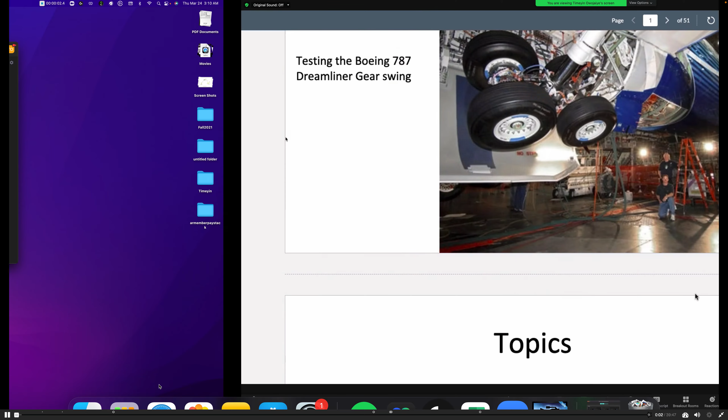Today, we're going to be talking about landing gear retraction systems. I'm going to need you to pay close attention because there's a lot of useful information in this video.

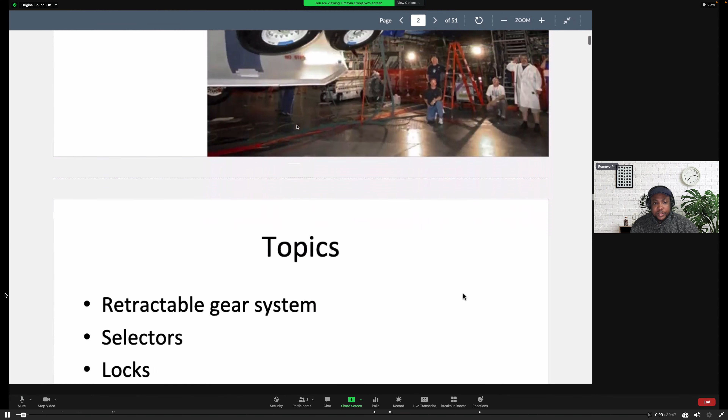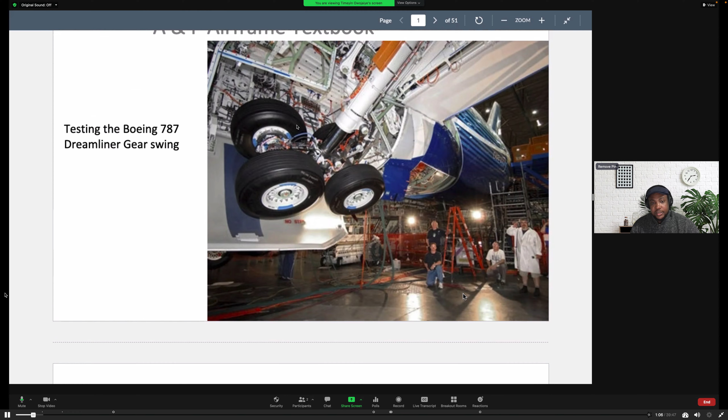The picture that we're seeing here is of a gear retraction, or gear swing that's happening. There's several reasons why we would need to do a gear swing, and I guess all of them could be wrapped up in safety. We want a situation whereby when the pilot does choose to retract, the gear does retract so that you don't exceed the maximum speed that you can with your landing gears extended. Even more importantly, when they come in to land, you want the landing gears to be able to extend so that they don't belly flop. Okay.

The topics that we're going to cover are retractable gear system, the selector knob that we use to actually select gear up or gear down. We're going to talk about the actual locking mechanisms. So there's going to be an up lock when the gear retracts back into the bay, it's going to lock. And we're going to talk about how it locks when it comes back down, and the extra features like the over center, as well as some pins that we put in to basically ensure that when it's locked down, it is locked down. Okay, let's go ahead and learn more about retractable gear systems.

I guess the contrast between the retractable gear and a fixed or rigid gear will be that the retractable landing gear system provides the advantage of having a more streamlined airframe, which leads to greater efficiency in flight, less fuel consumption because of the lower form drag or parasitic drag that is present. In a fixed system, the gear is extended throughout from the takeoff to the last phase of flight.

However, this retractable system has one little drawback, and that's because with a retractable system, it becomes necessary to have an emergency system for extending and locking the gear down in position in the event of a failure of the primary or normal system. So this is very logical because now you have the gear retracted, which is good, you're more streamlined. But what about when you're coming in for landing and that system fails to be able to extend? We need to have an alternate system of extending the gear.

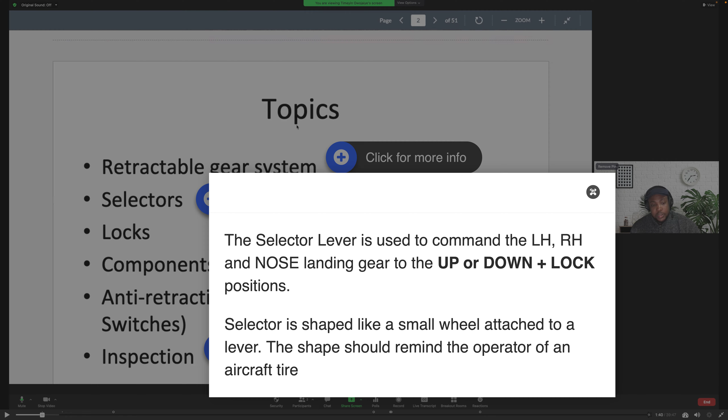We're going to talk about some locks, up locks, down locks, but let's look at inspection. Inspection of the system actually depends on what type of retraction system is installed on the aircraft. The three most common systems we have are hydraulic, mechanical, and electrical. This is important to remember.

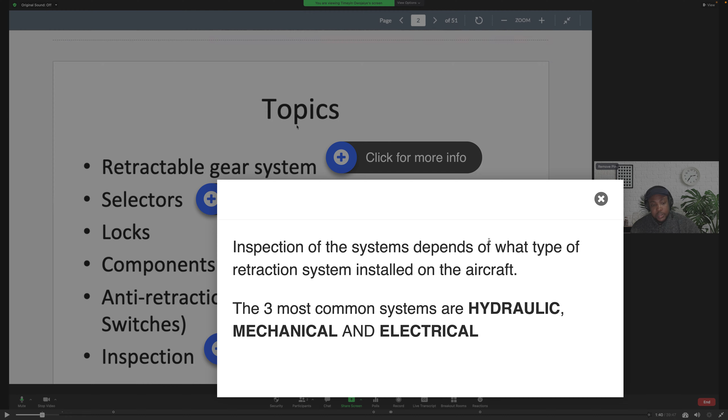We'll talk about sensors and switches that basically help the airplane coordinate what safety features to incorporate based on the current status of the airplane. What I mean by that is the weight on wheel switch, as well as squat switches. So we'll talk about up limits and down limits. So that basically tells you if the gear is up or if the gear is down.

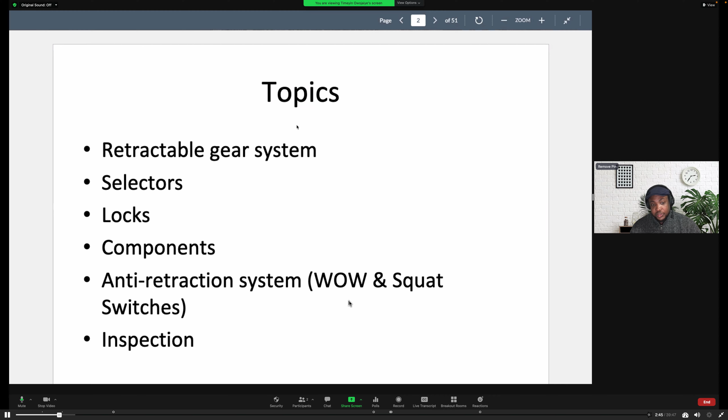And then we'll also talk about squat switches, which tell you if the airplane is in the air or if it actually is on the ground, because it's possible for the gear to be extended, but the airplane is still airborne, right? And we will have situations like that. So the airplane's flight management system needs to be able to decide what should be allowed to happen, and that's what also gives us some indications like warning horns, warning lights when we're trying to do something that's unsafe.

All right, there's a bunch of videos here that we are going to watch.

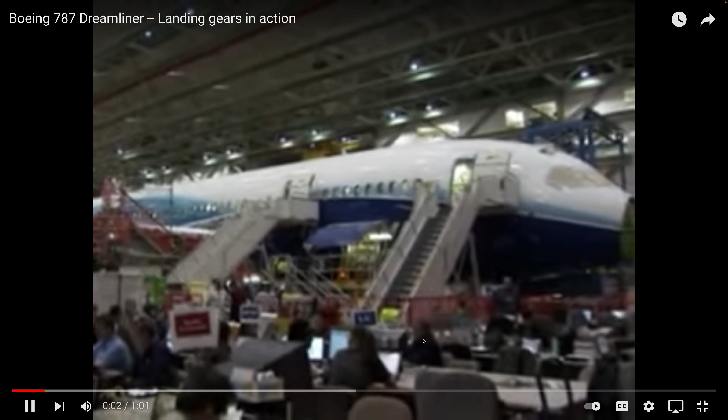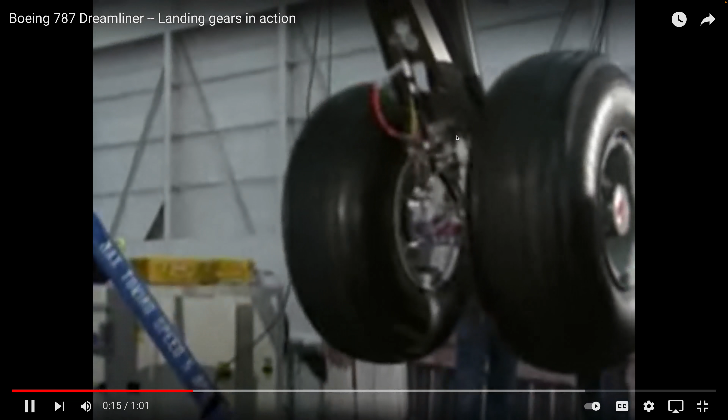To make the landing gear work, we use many different systems on the airplane, including the Common Core system, the remote power distribution system, the landing gear system, the hydraulics function running on the Common Core system, the hydraulics system itself, and all of these systems have to work together to allow the gear to be extended and retracted. Well, I would say this is probably the first time we've ever swung landing gear with about 4 million lines of computer code.

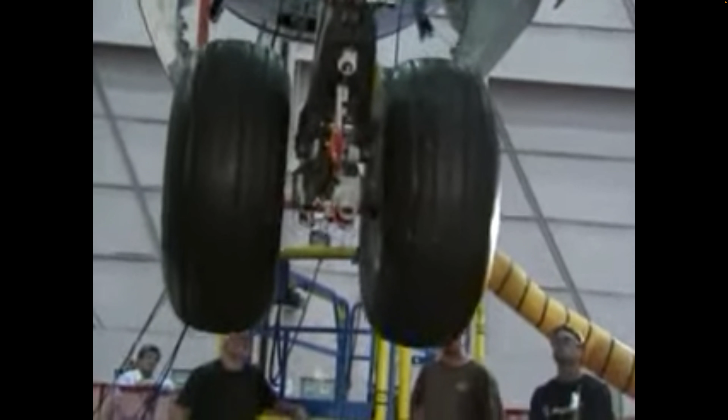The benefit of doing this is we have extend and retract and control by wire on our landing gear system, which is lighter and more efficient from an airplane perspective. Gear swing is one of the big milestones in the build of the airplane because it proves so many of the different systems and it proves their build. All those systems have to work together at the same time. This is a beautiful gear swing.

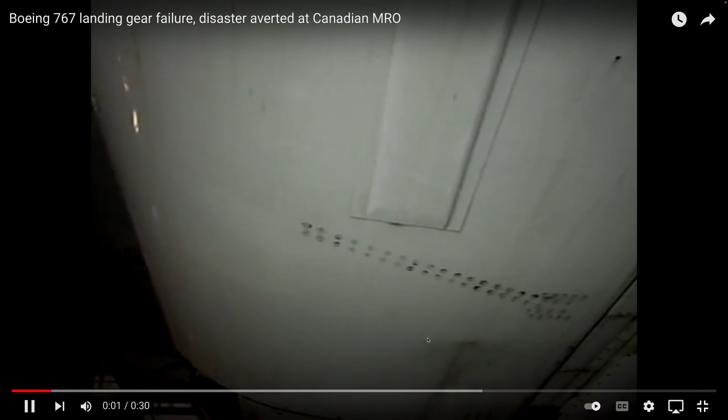Gear down. Coming down.

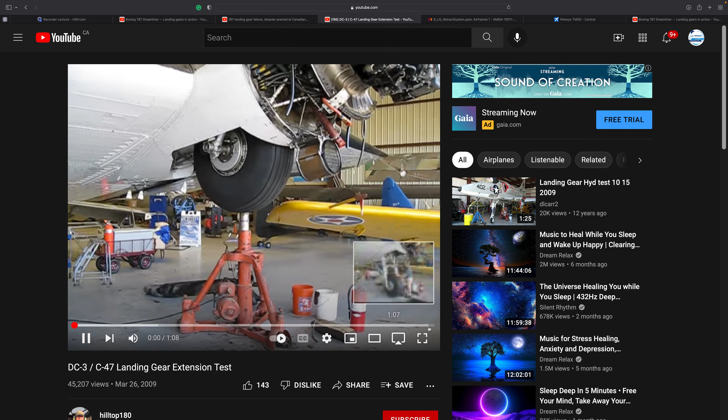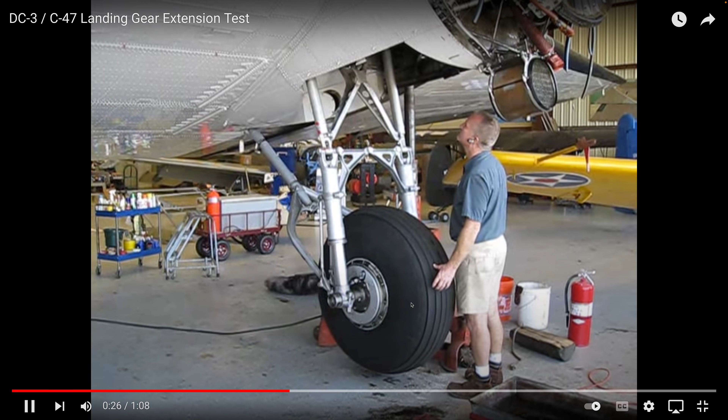No, don't pump yet. Is the handle all the way down? What's that? Is yours long? Handle down. Say again, Carl? Is the handle all the way down? Your handle's all the way down. Yeah. Okay, alright. Did yours lock? No. Nope. Okay, go ahead and pump it.

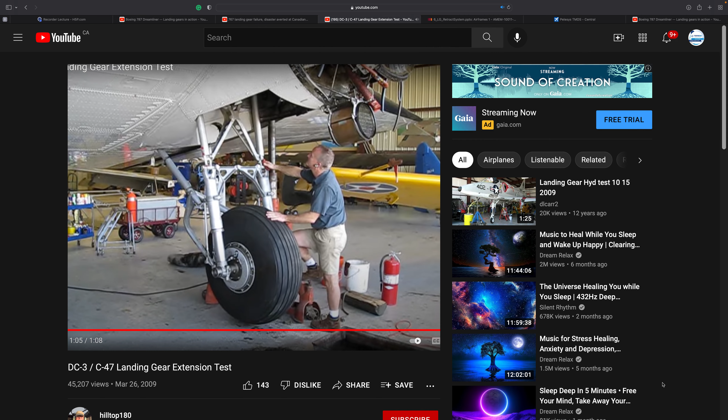Okay, they should be locked now. I heard two clicks. Yep, they're both locked. And Chuck, if you want to go ahead and lock, put them in positive lock. We'll come back to them at some point.

Okay, so obviously not all airplanes have retractable landing gear, but when we have retractable landing gear in modern aircraft, it gives us an added advantage of having less noise, being more aerodynamic and being able to travel faster. It basically reduces parasitic drag, a specific type of parasitic drag which falls under form drag, in high-speed aircraft operation. Right?

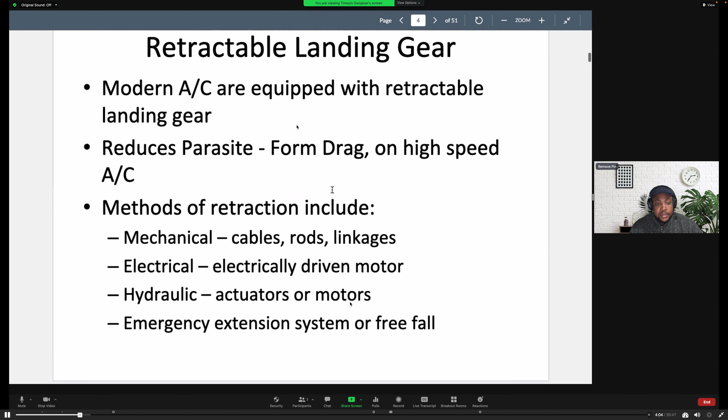If you remember, we talked about induced drag and parasitic drag. The layman's definition is induced drag is any drag that we can't do without. Basically, it's drag that comes from the production of lift, while parasitic drag is things like interference drag, form drag, skin friction drag, wave drag, etc. So the type of drag that would occur if we didn't have retractable landing gear will fall under form drag primarily.

So there are different methods of retracting the gear, and these include mechanical methods, which would have cables, rods, and linkages that physically move, etc. We have electrical systems, which will have electrically driven motors. We have hydraulic systems, which will have actuators and motors. Hydraulic systems are very popular for landing gear retraction because of the amount of power that they deliver. We also have emergency extension systems or free fall systems.

Let's take electrical retraction as a first example. An electrical motor is used to convert electrical energy into rotary motion. So the motor turns a reduction gearbox to decrease speed and increase the force of rotation. So that gearbox is what helps us to basically change that ratio of how much torque we'll actually get from the system.

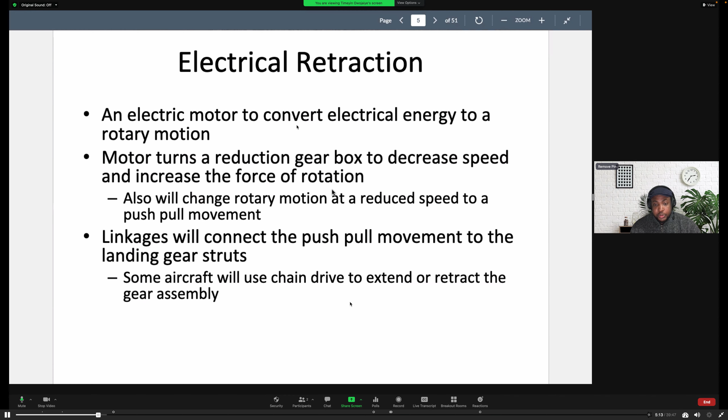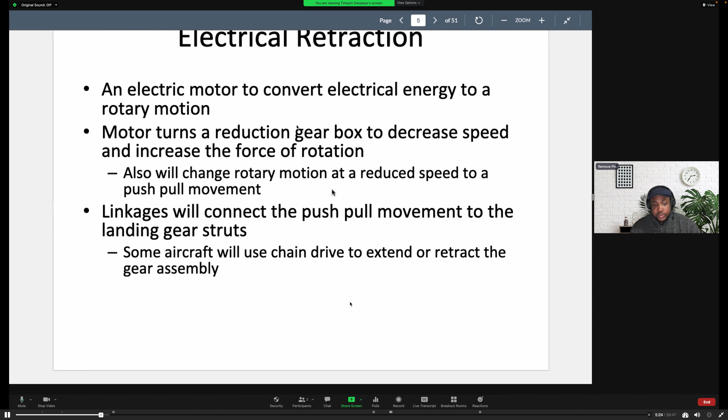This will also change the rotary motion at a reduced speed to a push-pull movement. Linkages will also be used to connect the push-pull movement to the landing gear struts. Some aircraft will use chain drive to extend or retract the gear system.

In the case of hydraulic systems, hydraulic actuating cylinders convert hydraulic pressure into a mechanical force. The selector valve is a selector that you can move up and down; the selector controls the actual valves that determine where the fluid is going to flow and where the pressure is going to be acting. So the selector valves direct the fluid flow to retract or extend the gear. We have sequencing valves that ensure that components operate at a certain time in a certain sequence, as the name implies.

All right, this now brings us to a quick quiz. What is the role of the sequencing valve? One option says it makes sure left hand, right hand nose doors open and close simultaneously. Let's see if that's the answer. Not really. Okay, let's try it again. It determines the correct order of door, gear, and lock movement.

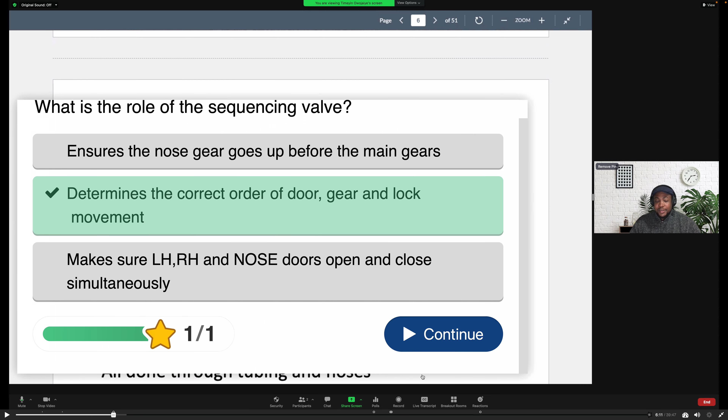Or it ensures the nose gear goes up before the main gear. So as we discussed, it determines the correct order of the door opening, I guess first the up lock, or whatever lock is holding it, the door opening, the gear being released, etc. Let's check. Correct. So obviously you want the doors to start getting into gear and moving before the landing gear begins to retract, right? So if you have a scenario whereby you're trying to release the gear and the doors are still closed, you can see how that could be a problem.

We have shuttle valves that provide a secondary passage. So this is like an alternate route for extension in an emergency. And all this is done through tubing and hoses, hydraulic tubes and hydraulic lines. In hydraulic retraction, most systems today actually use a hydraulic power pack containing a hydraulic reservoir, which is just a fancy name for a tank where we store hydraulic fluid momentarily.

A reversible electric motor, that is, an electric motor driven hydraulic pump. So we get a hydraulic pump that's driven by an electric motor. We have some pressure switches and some valves. So it's not a really complex system, and hopefully by the end of this lecture you have a better understanding of how hydraulic retraction works.

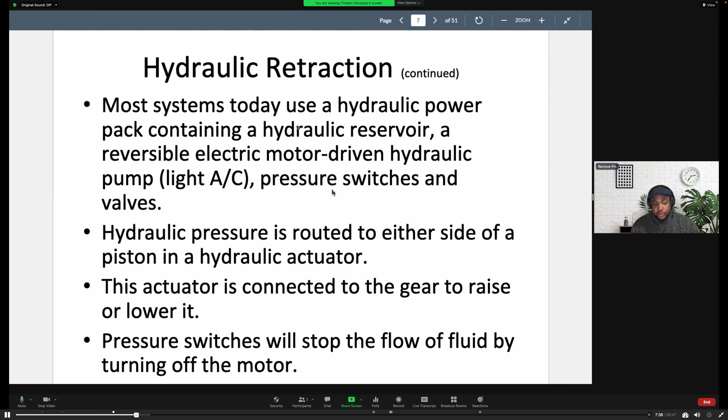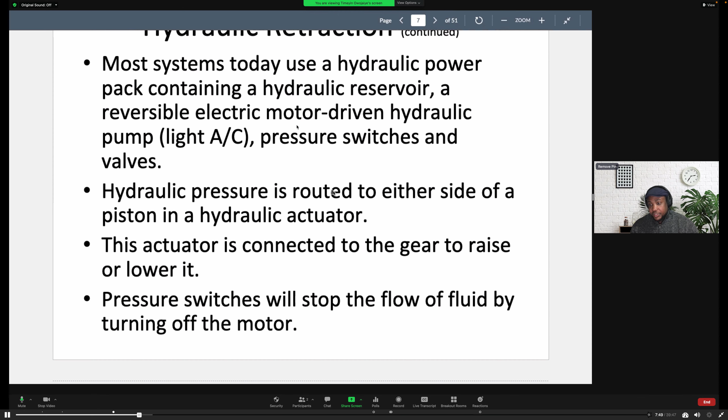Hydraulic pressure is routed to either side of the piston in a hydraulic actuator. This actuator is connected to the gear to either raise or lower it. The pressure switches will stop the flow of fluid by turning off the motor. So we need a pressure switch to tell us at what point we've achieved success, and we need to stop applying that force. So this is a simple picture here.

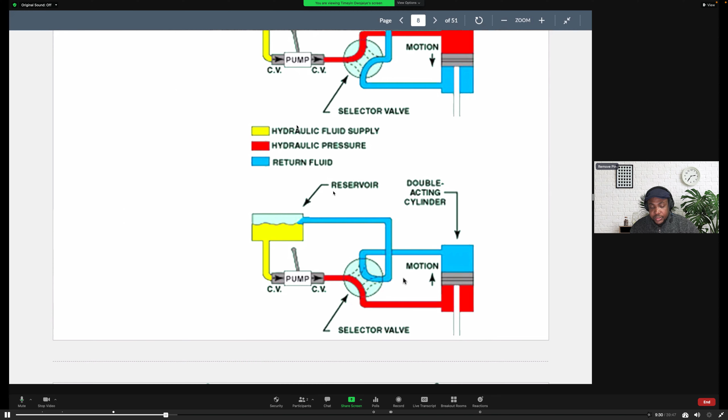In this example here, you can see that there's been a switch, the selector valve. So the selector valve is what's going to decide which way the pressure is going to be acting and which way the motion is going to be. If you look from here, you see the pressure acting from the top of this cylinder. So it's going to basically push the piston down. So it's going to bring this kind of down motion. By changing the configuration of this selector valve here, you can see that the motion is now facing upwards.

So in this case, you have a pump, you have a check valve, fluid passes through the pump, comes out at the other side, there's another check valve, and this basically acts as a pressure that's pushing the fluid now from here, and we have the return that's basically going to be returned back into the reservoir.

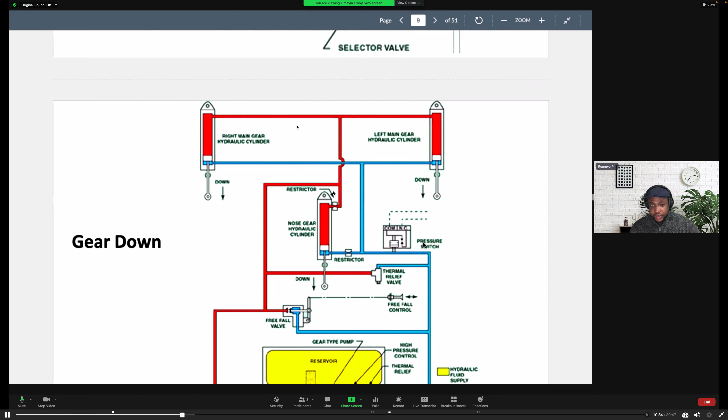So as you can see in this position, you have the gear down position, you have the pressure coming from the top, pushing that piston down on the right main gear, as well as the left main gear, as well as the nose. We do have some restrictors here. We have a pressure switch and a thermal relief valve. This system is the alternate system where you have a free fall control, but we'll get into that in more detail shortly. This is the opposite. This is when you are applying pressure from the bottom of the piston and basically forcing that piston up to create that upward motion.

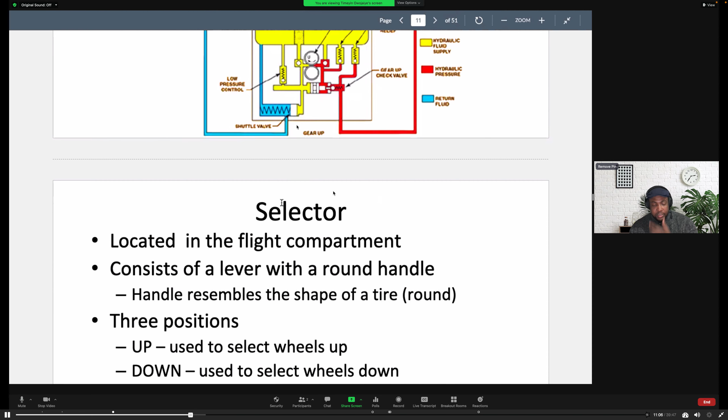So what is that gear selector? The gear selector is located in the flight deck, in the flight compartment, and it consists of a lever that has a roundish knob. I shouldn't say a knob. It's more like a wheel. Yeah. So it has a wheel that you can hold and move up or down. So it consists of a lever that has a round handle. The handle resembles the wheel of a tire. It actually has some portions that look like a tread. I think they're pretty cool.

Anyway, the selector has basically three positions that it could be in. It could be in the up position, which is used to select the wheels to go up. It could be in the down position, which is used to select the landing gear to extend.

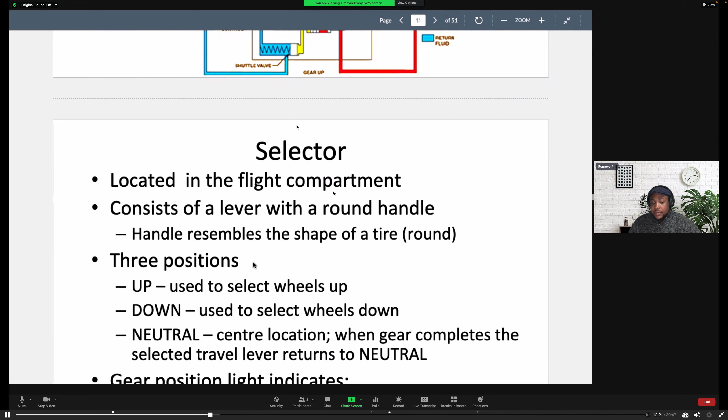And it has a center position. Basically, after you select one, it's going to return back to that neutral. If you select up, you close that switch. We'll talk a little bit more about the switch. And then now you're back into your neutral position. So the center position: when the gear completes the selected travel, the levers will return back to the neutral centralized position.

So gear position lights are also an additional safety feature. So if you're flying the airplane or basically doing a test, you would want some kind of visual indication, because from the flight deck, you may not be able to see the landing gear and know if the command that you've selected, i.e. gear up or gear down, has been completed. So we have gear position indicators in forms of lights that tell us what the condition of our gear currently is.

So we have it down and locked. When the gear is extended down and is locked in position, you get a green light. Obviously, green would be a good light. When you're coming in for landing, you want to make sure that you're going to see that green light so that you can come in on approach. When you have your landing gear door open, you get an amber light. So you want to know that you have your landing gear door open. Or if you don't want it open, you still want to be able to get that indication.

And so amber, important. When the gear is in transition, so that means you've selected gear up, but the process is still happening, you see a red light. You see a red light come on, right? And so you need to remember that red light.

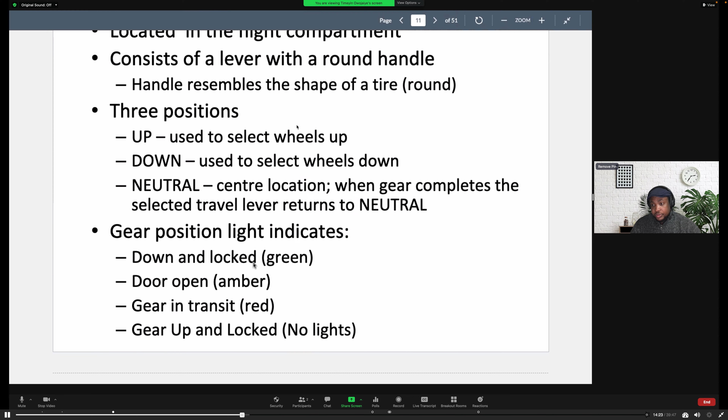We also have a gear up and locked. So once the gear has retracted and is up and is locked and everything is good, you get no lights. That's kind of the new ideology in aviation. Basically, if everything is fine, you don't want to stress out the pilots. It's going to be blank. That means everything is good, right? Nothing to worry about.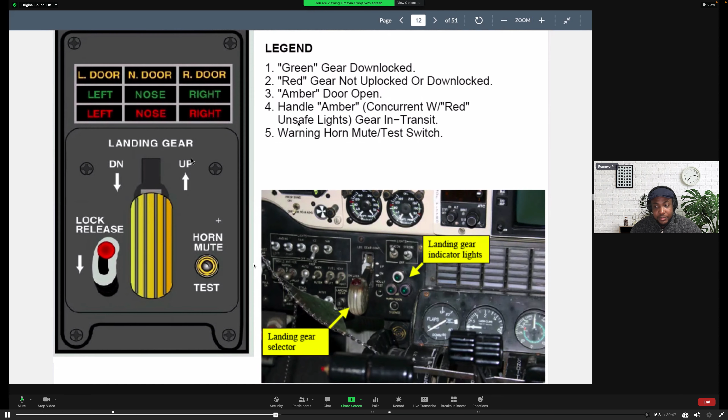You can also see some annunciators here. So this would be for the left door, this would be for the right door, and this would be for the doors at the nose landing gear. So you have left, nose, right, to give you indications if you have green, red, or amber. Okay, so amber is for door open position. Green is for everything is down and locked. And red is for gear not up locked or down locked. So that means it's still in the process of completing your command. So this is the gear selector.

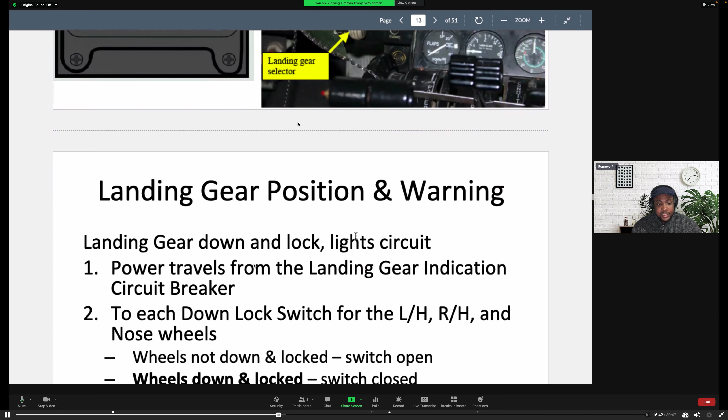Landing gear positions and warning. Landing gear down and lock. You have light circuits, so we're going to be looking at some of that circuitry. But let's first go through what happens verbally. Power travels from the landing gear indication circuit breaker to each down lock switch for the left hand side, the right hand side, as well as the nose gear.

When the wheels are not down and locked, the switch is going to be open. When the switch is open, it's not a complete system. So it's broken. You have power coming from one side, but you don't have a complete circuit because it's open somewhere in between and you're not able to make ground, so you won't get an indication.

When the wheels are down and locked, the switch is closed. That means the circuitry is complete, and now it can go from power, through the light bulb, and basically back down into ground. Obviously, there's relays in between that help you to actuate that switch.

When the landing gear is down and locked, power travels to the applicable gear light. The gear light illuminates green to indicate that the landing gear is locked. So you get 3 green. This indicates that the left, the right, and the nose are locked.

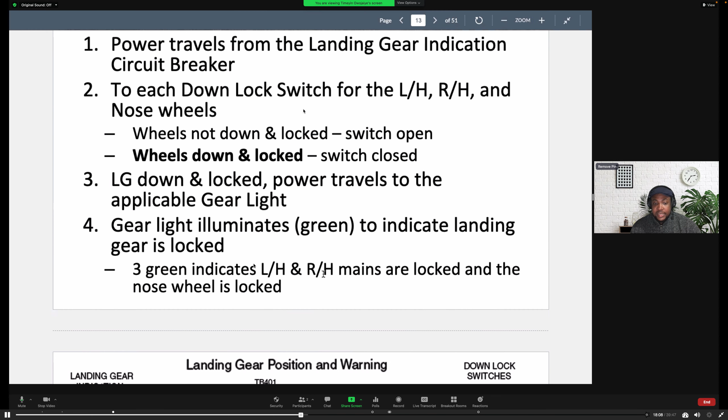So this is what the circuitry looks like. This is your power source. Now that power source comes all the way here. This system, if you see, splits off into 3. This is one system, another system that's getting power, and the final system. This one represents the left main gear and the lights. This represents the nose gear and the lights, and this represents the right main gear.

When you've selected your down position and everything is completed, you're going to get 3 green. But there's a process that has to happen for that. Once you select the gear down, you're basically going to close that switch. The switch position was somewhere here before. Now you close that switch, and that allows the circuitry for the left main gear to be complete. Scroll down, you see that you have the green light once it's down and locked. Okay.

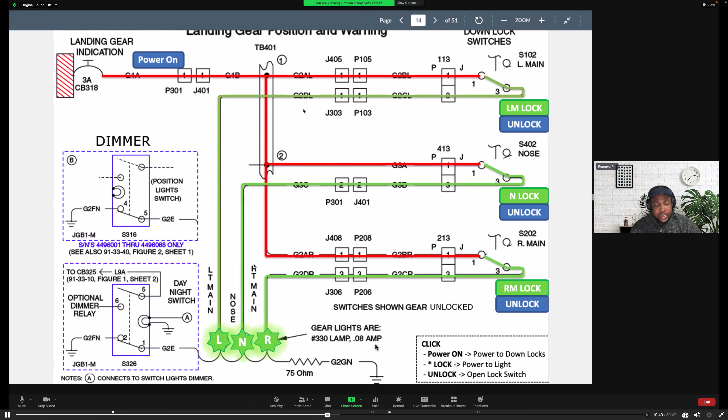You look at the one for the nose, so you have electrical power coming from the main bus. It comes out this way. The switch for the nose, if you have a complete closed circuit, then you get the light for the nose, and the right gear is the same. So you have a .08 amp lamp that illuminates to let you know that the gear is down and locked. These are the ground for the systems, but they won't be complete until that switch is closed.

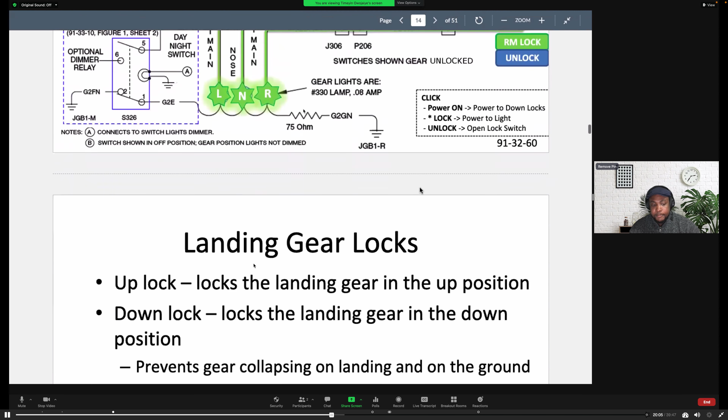Okay, now let's talk about landing gear up locks. Up locks lock the landing gear in the up position. The landing gear is kept up ideally by hydraulic pressure, but there is a lock that's used to lock it up. The down lock is used when the landing gear is fully down and extended, and this prevents accidental collapse of the landing gear while you're on the ground. You would hate to be taxiing along after a good flight and have your landing gear buckle in. So we have a down lock that ensures that it's locked.

We also have something called an over-center linkage. An over-center linkage is like an elbow. Instead of just locking into position, it actually goes over center. It acts as an additional safety mechanism to make sure that even if the airplane lands with some side loading, it doesn't accidentally shake out of the lock position once you've locked it. So that's the over-center linkage, the linkage that travels beyond the center. It goes a little bit further, and it's an additional method of ensuring that the gear stays locked down.

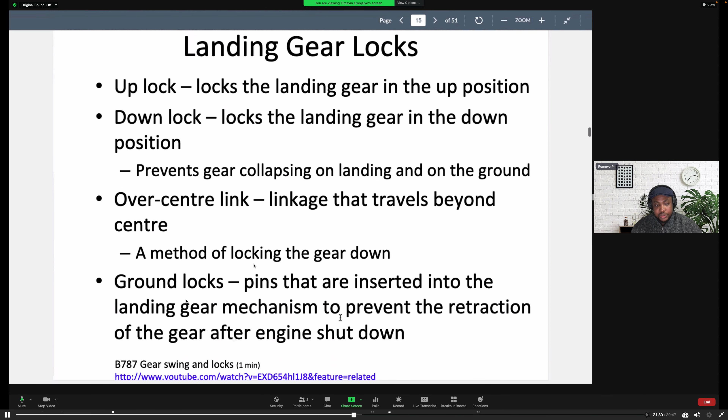We have ground lock pins that are inserted into the landing gear mechanism to prevent the retraction of the gear after you've shut down the engine. These are pins that go through a certain orifice, and that acts as a means to prevent the landing gear from retracting once you're on the ground. The only time you would leave this in is maybe when you're going for a maintenance run.

You're going to run the aircraft engines, and you know there's no way you're actually going to be flying the airplane, so you don't have to worry about that. You may leave them in, but otherwise, whenever you dispatch the aircraft, you want to make sure that you take out these ground locks so that the airplane is able to retract the gear and have a good flight.

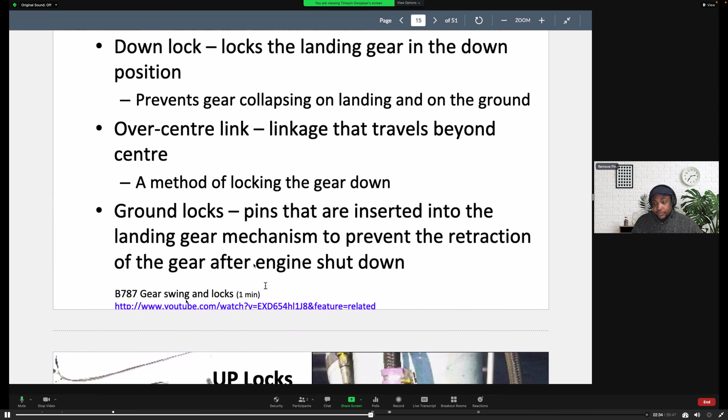There's another video here that we're going to watch in a second.

Okay, this now brings us to another quick quiz. This one's heavily loaded. The question is, what are the safety features of the landing gear when the aircraft is on the hangar floor for maintenance? So this question is specifically asking us when the aircraft is landed, is on the ground, is in the hangar, what are the safety features that we have?

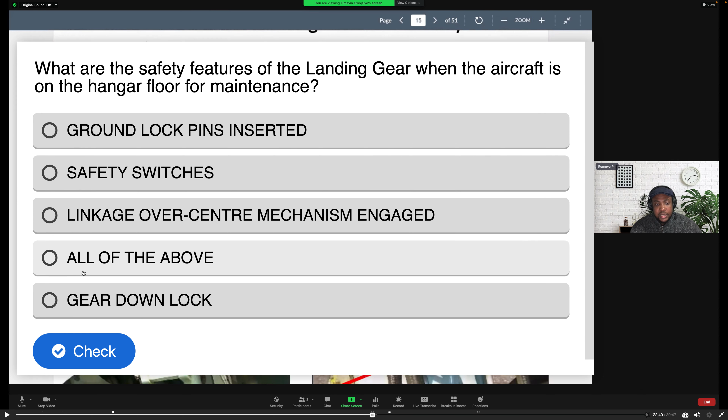So the options are ground lock pins that are inserted, safety switches, linkage over center mechanisms engaged, gear down lock, as well as all of the above. So let's see if we choose all of the above. Yes. So let's take a quick look.

So the ground lock pins are the removable pins with the red streamers that when inserted prevent the gear from folding. Our safety switches are also important. These safety switches lock the gear selector handle and remove power to the retraction system. So this is important.

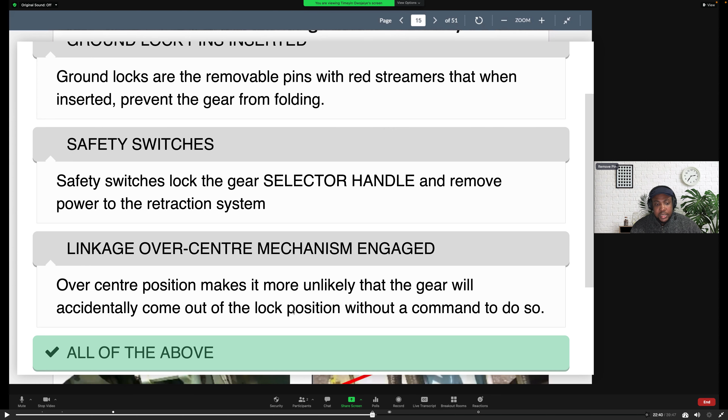The linkage over center. The over center position makes it more unlikely that the gear will accidentally or incidentally come out of that lock position without a command to do so. Okay, so there we are.

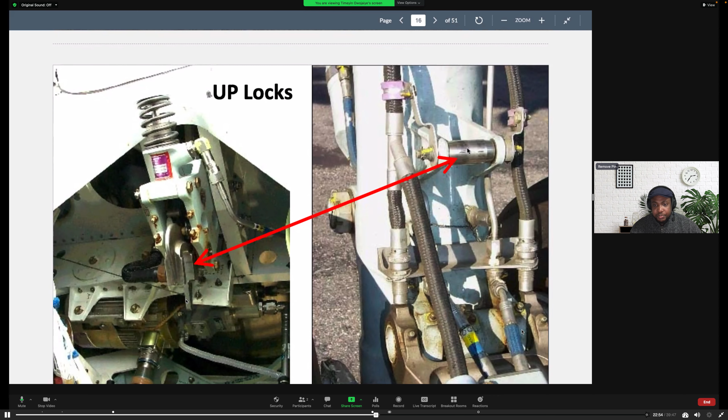Regards to up locks. So this is the up lock. That is where the gear actually goes into lock, and this is the roller that's attached to the landing gear system that actually goes and sits inside that hook when you retract the landing gear fully.

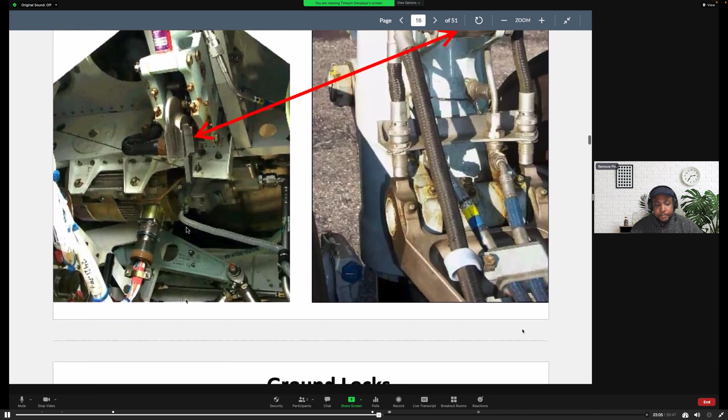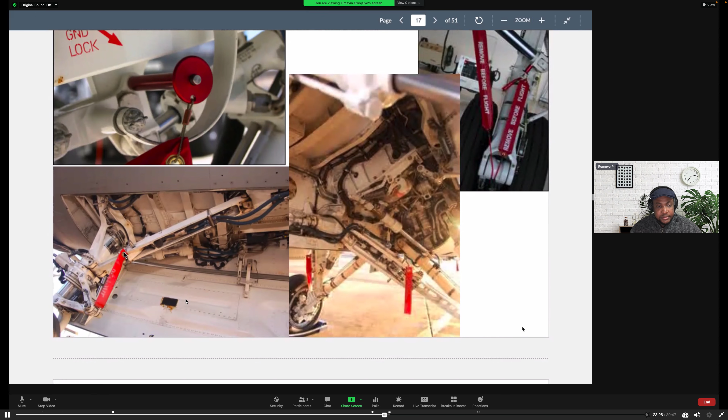These are ground locks, and these are the pins. They'll have a streamer that will be visible to anyone operating or doing a walk around, and these will say remove before flight. So you can see the insertions of these pins. This was an accident that happened. It's rumored that this was as a result of a hydraulic system check, and the pins had not been installed in the gear.

All right. Quick question about some lights. So I know we talked about the lights that we get when the door is open. We get that amber light, right? The landing gear annunciator panel shows a red light when any gear is still in motion and has not completely locked in the desired position. Is the statement correct or is it false?

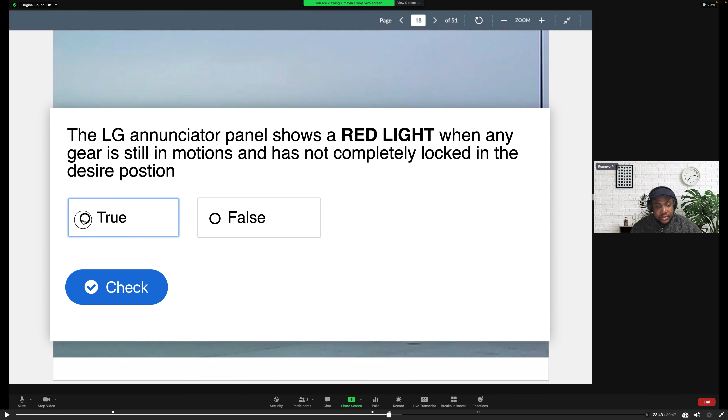The landing gear annunciator panel shows a red light when any gear is still in motion and has not completely locked in the desired position. I'm going to go for true. That's correct. This was an accidental retraction, apparently.

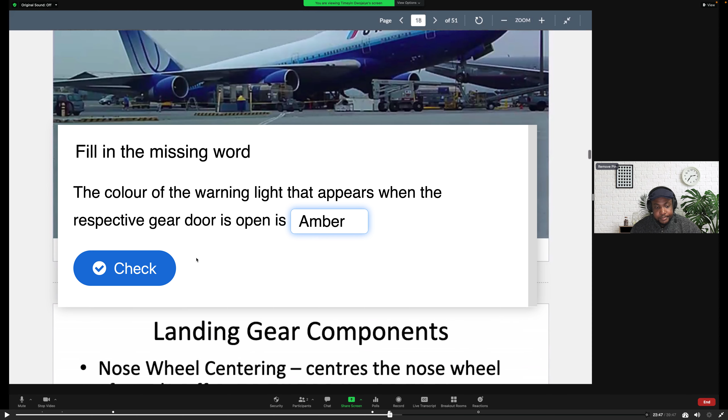Now, I just mentioned this. The color of the warning light that appears when the respective gear door is open is dash. So the correct answer here would be, drum roll, amber. Hooray. You would also be correct if you selected yellow, but amber is the color.

All right, let's talk about landing gear components. We have some components, systems, I guess, checks that help us to keep the landing gear operating functionally. So we have a nose wheel centering. This centers the nose wheel after takeoff. So after takeoff, you want to make sure that the nose wheel is centered. So we have something called nose wheel centering feature.

We have drag struts or drag braces. The drag braces basically support the aircraft in the forward and aft direction. So this would be forward. If I was sitting in the captain's seat facing forward, the drag struts basically provide that forward and aft support.

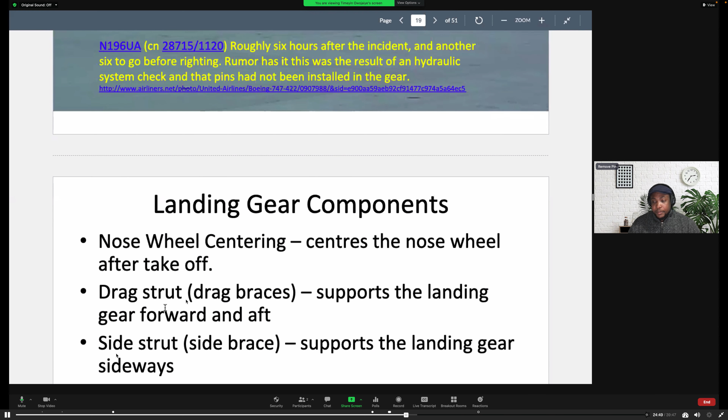Conversely, we have side supports or side struts or side brace, and this supports the landing gear in the sideways orientation. Quick addition is that what this side strut attaches to is where we actually have the gear down lock mechanism, right? So we have the down lock. It is also carried by this side brace.

This now brings us to torque links. Torque links are like a scissor link. They basically attach the lower cylinder and the gear, the inner cylinder and the outer cylinder to the gear. So it's like a scissor link that basically allows it to be centered, but allows the outer cylinder and the inner cylinder to move relative to one another.

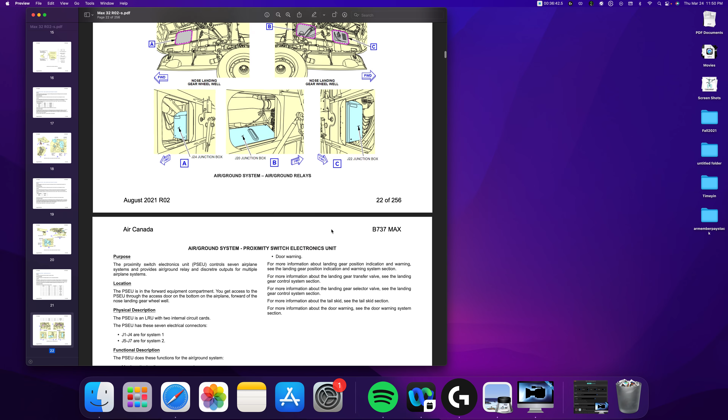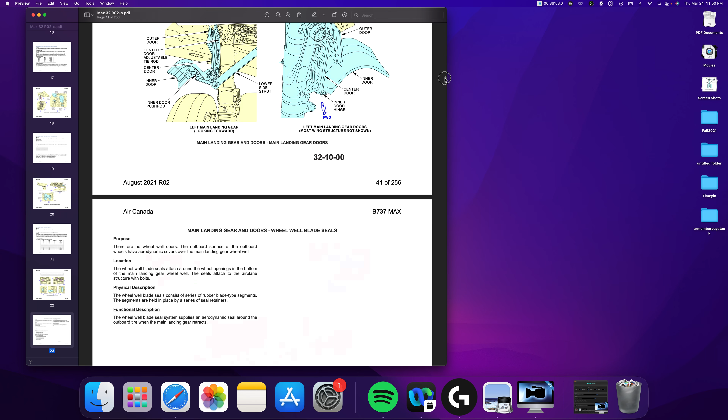And these are the torsion links or scissor links. So they're called torsion links or scissor links. Same name would apply. So the torque links or scissor links connect the axle assembly to the main gear strut. This keeps the wheel aligned with the main strut, but still allows it to be able to move up and down.

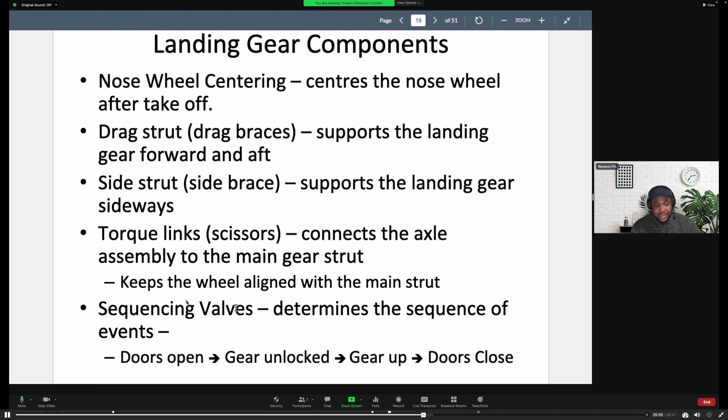We have sequencing valves, and basically, like I mentioned earlier, the sequencing valves determine the sequence of events. So, i.e., you could have doors open, and then you want the gear to be unlocked from that down lock that's holding it. You want the gear to go into gear up, and then the doors to close. So this would be for returning the gear back into the bay. So this is a retraction sequence actually.

So you want the doors to open up so that there's a place for the gear to go. You want the gear down lock to be disengaged, so the gear is unlocked from that down lock system that's holding it. You want the gear to be pushed by hydraulic pressure and retracted up, and then you want the doors to close. And this is a sequence that you're going to be watching when you look at those videos.

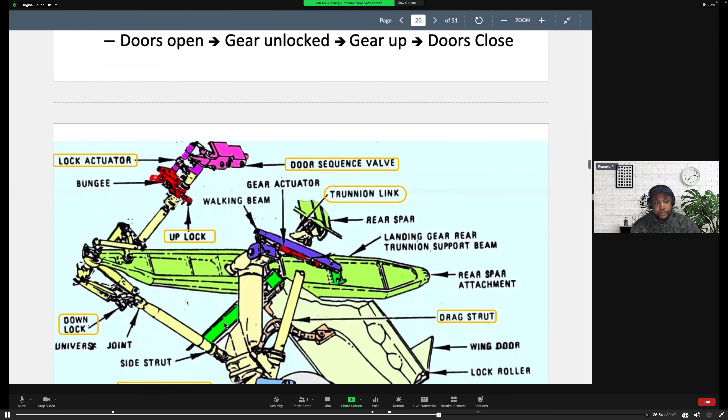So this right here, this is your drag brace, right? So this is the aircraft, and this is us facing forward. This is your left main gear that is shown. Obviously, there's one wheel on this side, but there's also going to be one wheel on the other side. This wheel is not shown just so that we can see the brake system. We can see the axle and that axle sleeve.

You can see the shock struts, and then you can see the up-lock roller. So the up-lock roller is going to be located here, and when the gear is retracted up, it's going to go into this up-lock hook here and stay there in that J-hook, right? What I said before, I said this is the side strut. So this is a sideways view, and this basically supports the gear to the side because the gear is going to retract in on its side, right?

So the main gear is going to retract into the landing gear bay in the belly of the airplane. So this is our side strut right here, our side brace. And as I mentioned earlier, it carries this important down lock mechanism. We have the doors.

Obviously, the landing gear is a very important piece, and as such, it will be attached to a strong point, which is going to be the rear spar attachment. Okay, so this is the landing gear rear trunnion support beam, and then we have the rear spar up here.

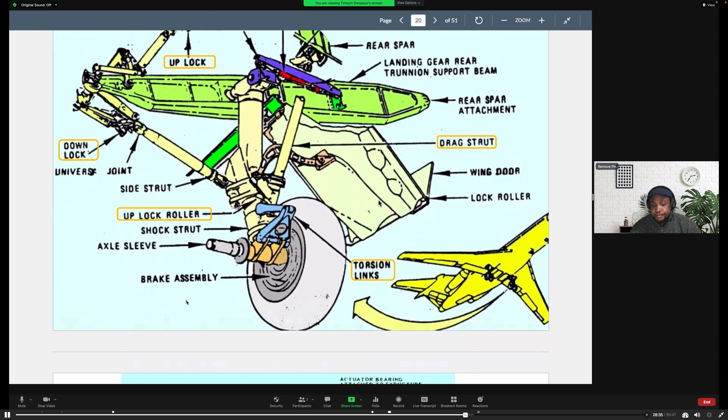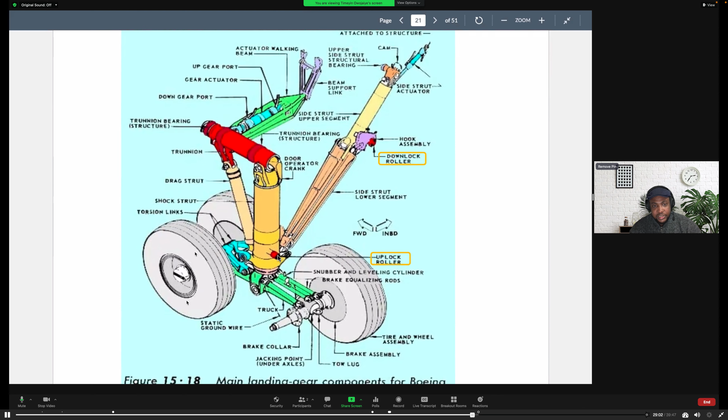Okay, so this is the torsion link that I talked about. The torsion link basically attaches the axle point to the upper gear mechanism. It allows for some movement, but it makes sure that it keeps it centered so that the two cylinders are centered one to another. This is another picture here showing that. So that's the up lock roller that basically goes and gets locked into that up lock mechanism that we showed over here.

The up lock mechanism, the receptacle. So you can see our torsion links right there. You can see our shock strut, the drag brace that basically supports that forward and aft support to the gear. You can see the side brace, and the side brace carries that down lock roller.

Okay, so quickly, just to clarify the difference between the function of that scissor link and what the centering cam is. So the centering cam is specifically for the nose wheel, and it is designed so that the nose wheel is centered for retraction and extension. Right, so we want to ensure that the nose wheel is centered for retraction and extension of the gear itself.

The scissor links basically allow some movement up and down, but it's not about really retracting the gear, and that's why in some towing operations we actually need to disconnect that scissor link to be able to allow for that rotation, so that we can tow the aircraft at greater angles than the torque link would allow us to do. Okay, so that's important that we know that.

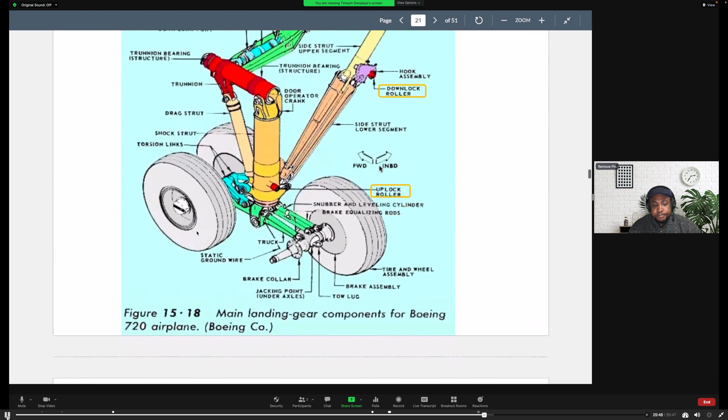This now brings us to the squat switch, or the weight on wheels. So we have a safety switch. This safety switch prevents gear retraction when on the ground, because this could be an undesirable time to have the gears retract momentarily.

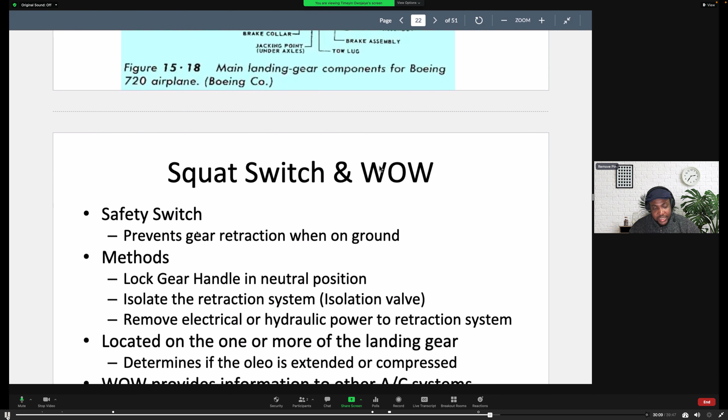Methods. We have the lock gear handle should be in neutral position. So that's why we have an up selection. On the selector, we have a down and we have a neutral. It always comes back to neutral, and there's a lock there. If you remember, there's a red lock that you have to kind of push in to get that lever to be able to move.

Then we have the isolates the retracting system. So we have an isolation valve that basically makes sure that certain conditions have to be met for that system to become activated or become live. We have a way to remove electrical or hydraulic power to the system as well. Located on one or more of the landing gear systems, we have the safety switch that determines if the oleo is extended or compressed. So we have the squat switch.

So the WOW switch, the weight on wheel switch, provides information to other important aircraft systems like your thrust reversers, your avionics systems, your brake anti-skid, some flight controls, your ground spoilers, so that they know when to actuate. If they don't feel that the aircraft is on the ground, it would be unfortunate to release ground spoilers, because this would probably give you a really hard landing, as you would lose altitude, because then it wouldn't be acting as a ground spoiler. In that case, it would be acting as an air brake to help you lose altitude rapidly, and that's not what you want to do when you're coming in to land.

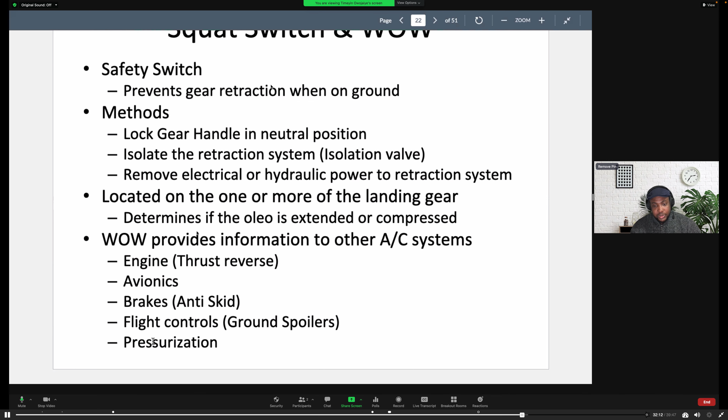So there's several important systems that you want to have. The anti-skid wants to know that the aircraft is actually on the ground before it kicks in, etc. And as well as for pressurization of the entire aircraft, right?

This now brings us to the Piper Seminole design. So this is an aircraft that's usually used for training, and it has some of its own special features in terms of its design. So we have the landing gear squat switch. So the landing gear squat switch circuit, when you select the gear up, the power is going to travel from the hydraulic pump of the landing gear control CB.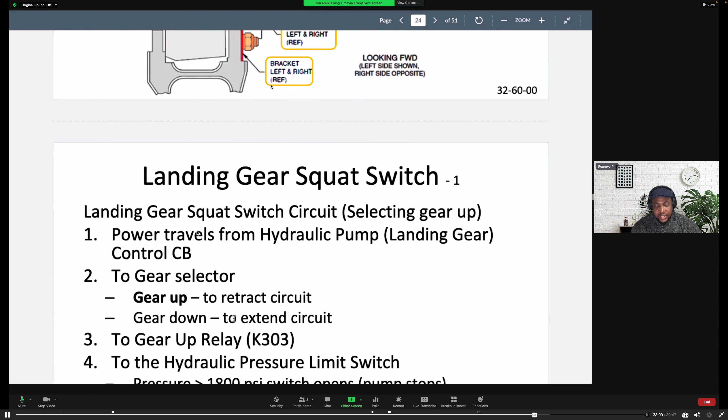The gear selector, once you have gear up, this will basically close the retract circuit. If you have gear down, this will close the extend circuit. The gear up relay is going to be K303, kilo 303. Just keep that relay in mind. That's for the gear up. To the hydraulic pressure limit switch, when you get pressures that are greater than 1800 psi, the switch will open and the pumps will stop. When the pressure is less than 200 to 400, the switch will close.

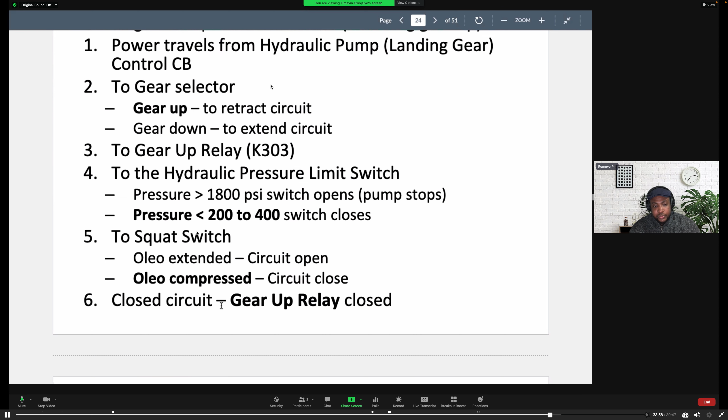If the oleo is extended, then the circuit is going to be open. If the oleo is compressed, then the circuit is closed. So that's how that weight on wheels, or that squat switch, basically works. So this will give us a good indication too. A closed circuit, we have a gear up relay that is also already closed.

We have a hydraulic pump circuit. The power travels from the hydraulic pump power CB. Same thing happens to the up relay. The up relay needs gear selected up and the weight on wheel switch to close. Right? So you have to select the gear up, and get that weight on wheel switch before the up relay is going to close, which will complete the circuitry and make the system operate.

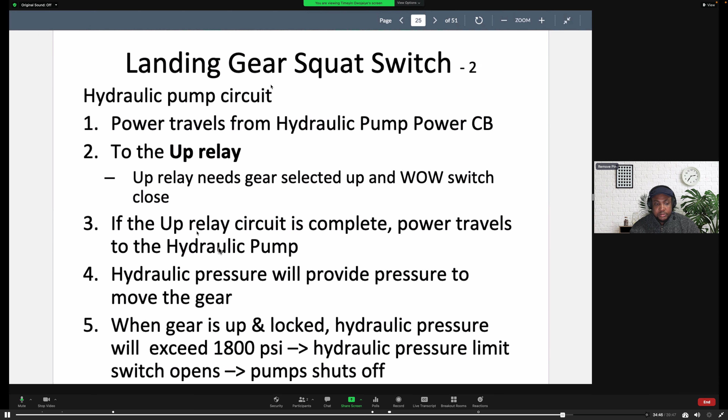If the up relay circuit is complete, then power travels to the hydraulic pump. Hydraulic pressure will provide pressure to move the gear. When the gear is up and locked, you have hydraulic pressure. Once the hydraulic pressure exceeds 1800 psi, the hydraulic pressure limit switch will open and the pumps will shut off.

So that's where, if you remember, I mentioned us having limit switches, and that's quite different from the weight on wheel switch. So the limit switches tell us if the gear is up, retracted, or extended, but it doesn't necessarily tell us if the aircraft is on the ground or if the aircraft is airborne.

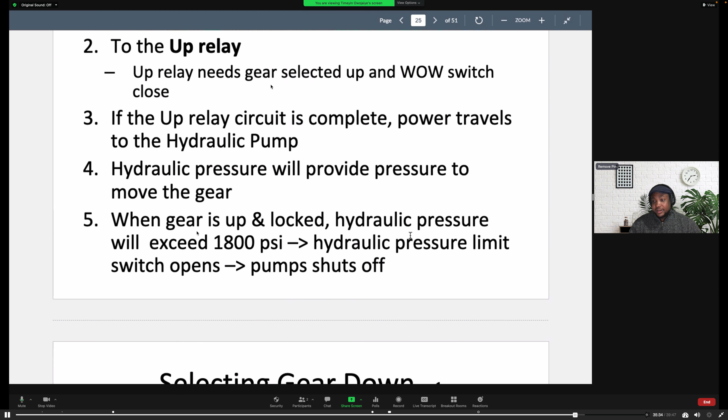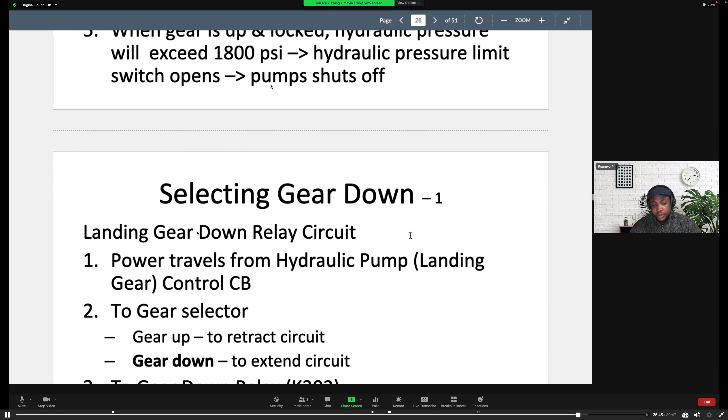So when you select the gear down, you have a different circuitry. The landing gear down relay circuit: power travels from the hydraulic pump into the control CB to the gear selector. Once you're in the gear up, this will close that retract circuit. Once you select gear down, this will close the extend circuit. So you want to select the gear down in this case.

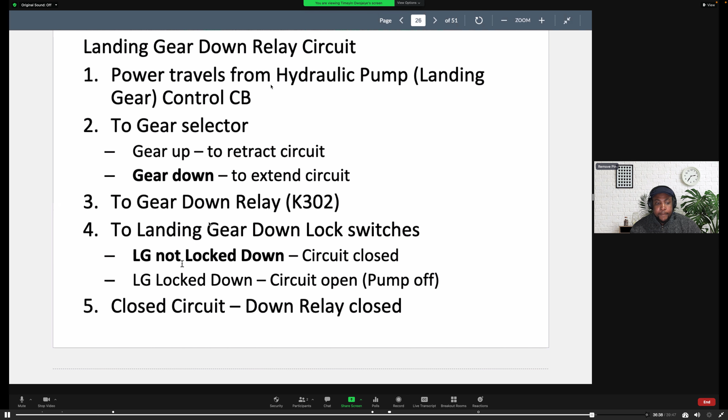This goes down to a different relay for gear down. If you remember, for gear up, it was K303. Now it's K302. So the landing gear down lock switches: when the landing gear is not locked down, the circuit will be closed. When the landing gear is locked down, the circuit will be open and then the pump will shut off. With the closed circuit, the down relay will become closed. So that is the condition that is required.

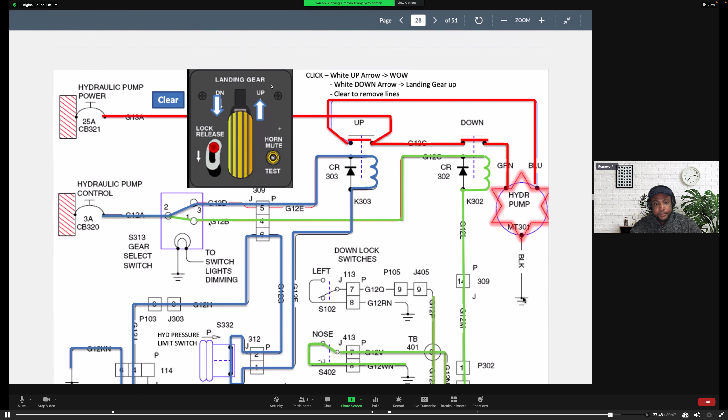Now, once it's closed, you have a complete system that goes around this way and then comes here and can make ground. So it goes through a hydraulic pump and now can basically complete the ground circuitry, right? The same is true for the other system, which is for when you select the landing gear selector to down. So remember, this is the landing gear selector and it looks like a wheel.

When you select it to down, you always still have that power. The power comes from here. It can actually bypass this relay and come all the way here. If you have the selector selected to the down position, it will activate the relay K302 for down, and that would basically close that down circuitry and also give you that hydraulic pump that would allow the gear to move.

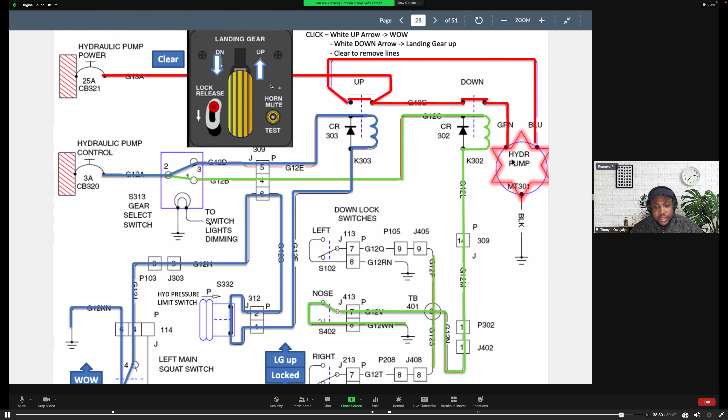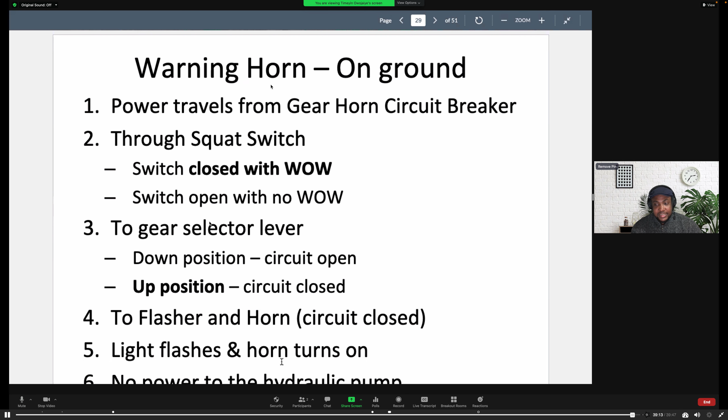So now we want to look at some warning indications that we could possibly have when we're operating the aircraft. So power travels from the gear horn circuit breaker through a switch, a squat switch. The squat switch is closed with weight on wheels. If you select the gear selector lever to the up position, you have a circuit that is closed. So you're going to get that horn when you are trying to do something that it's not designed for. Let's look at the circuitry. So if you basically get that horn, it'll also ensure that it does not power the hydraulic pump.

Okay, so one quick example of this: as an aircraft maintenance engineer, a pilot reports that he gets a loud horn in flight when he puts the throttle to idle. So, you know, what could possibly be causing this? What kind of troubleshooting would you do?

Short of going to the fault isolation manual, you should possibly suspect that the throttle and the landing gear position are in disagreement, right? So if he's getting that loud horn in flight when he tries to put the throttle to idle, it basically shows that there's a disagreement between the throttle position and the landing gear position. The hydraulic pump won't come on, so you won't get any action.

Okay, that pretty much wraps it up for us.